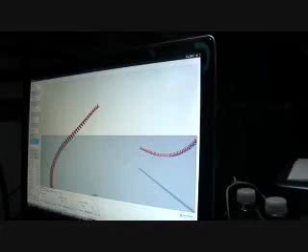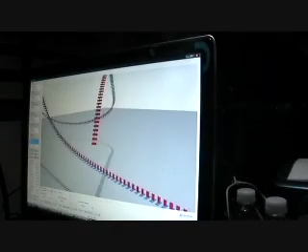And then we add another section, and we've sort of got a little ejector hill here. This is a trick that I do with this. Now I can change the length of that ejector hill, but what I want to do is make sure that the segment right after it will be able to clear in a good way.

So we'll bring that up to about 2.5, and then we'll add a roll, a positive, let's go 40 degree roll.

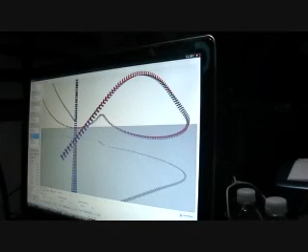And then we can add a little bit of time to that, so I put it up to 1.2. Now the ejector hill that I had before will increase that time zone, and that's making it cut a little bit too close, so we may actually have to make it less than 1 second. So there we go. Now it's a 0.8 second ejector hill.

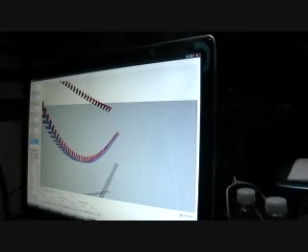And this is what I've always found to be the trickiest part of making Newton coasters, is it's hard to get them to a good stopping point.

And so we'll add a new segment, and then we'll set the roll to 0, which means subtract 40. And then we'll take the G's, the vertical, and we'll put it down to, let's go 0. So we subtract 2.5.

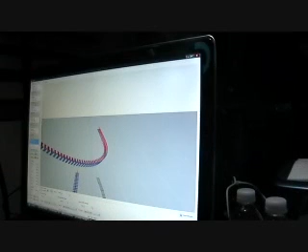And then let's make the time zone down to 0.8. And this could cause high G's, but we're just going to have to risk that this time. And right now you can see we're sort of going to be pointing back onto the track right now.

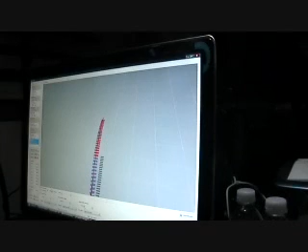So we're going to do a little bit of a weird move, and we're going to take the lateral settings and add negative 0.2, and with that we can see it's going to start diverting it away from the roll, and I'm seeing already that it won't quite be enough. So we're going to move back to this segment right here.

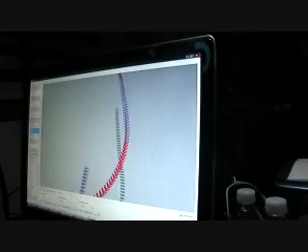This is the one that has no changes, and we're going to bring the time of that one down to 0.8. In fact, that's looking so good already that we might just take off.

This is another trick, of course. You can adjust certain time zones, especially ones that don't have any changes, and as you can see, by changing the time, it changes which way they turn.

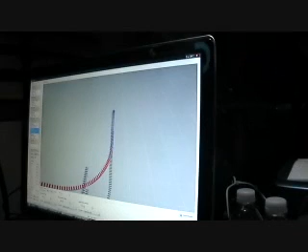Now we're sort of, 9 is too much, 8 is too little, so we can go in here and edit and tack a 5 on, and wow, that actually looks quite good.

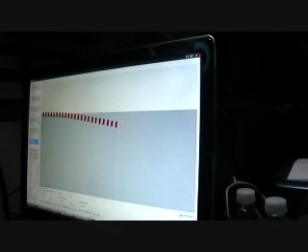Then at the last second, then we'll bring the vertical G's up to 1, and we'll shorten the time segment to 0.7. And then we will save our element.

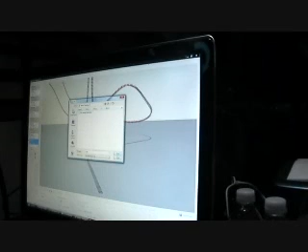So we click over Save Element, then we got to get a path. So we will navigate to our element folder for the Newton tutorial, and then we'll save this as part 1. And we save there, and then click Save Element.

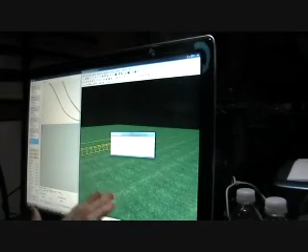And voila, now we go into our No Limits track, and let's see how well it fits. Control E, part 1, open, and you do not want to touch the percentage for this. It needs to be exactly 100. And click OK, and wow, we've got our coaster.

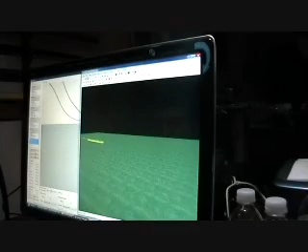And it looks a little bit scrunched up against the wall, which could be bad. So we'll Control Z that out, and we'll go to top view, and just drag a box around everything, and just hold down on the down arrow for a little bit. Or we can drag it, and we'll put the vertex of the end segment on the launch, and we'll try and get it right about on the origin.

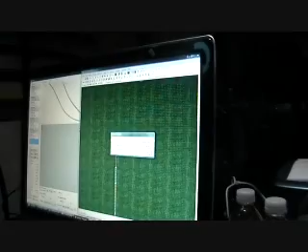And now, when we add on part 1, there should be plenty of room. And look at this. The segment actually ends almost exactly where the station is. That'll be pretty nice for us.

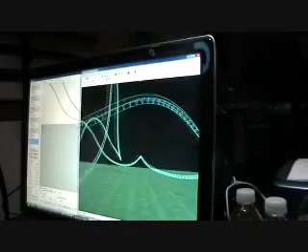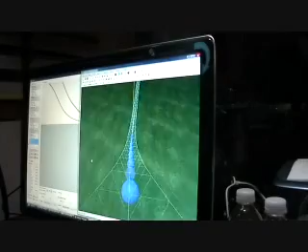It'll make getting back to the station a bit easier. So now we've got our Newton coaster. It's a good thing to ride this in the simulator and just move through it to see if there's any really rough spots. So we've got that part that's smooth, and there's the airtime curve, and here's the overbank curve, and into our 0G roll, and into our corkscrew, and then up, last ejector hill, and curve, and brake run.

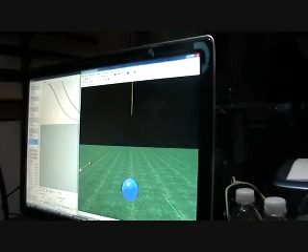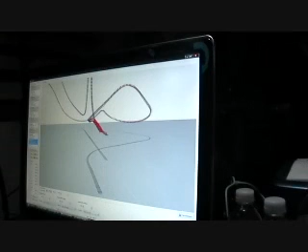And for the brake run, we got to go a little bit more advanced into elementary and Newton. So what we'll do is, when we go back into Newton, and then we click on the last segment, and then we look at the pitch, and we see in here that the ending pitch is -7.119.

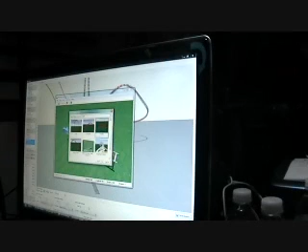So what we'll do is we'll open up elementary and Control New, or Control N for new, and we'll do straight, and we can just go with 10 meters again, but for the slope, now we input -7.119, and this will be our brake run.

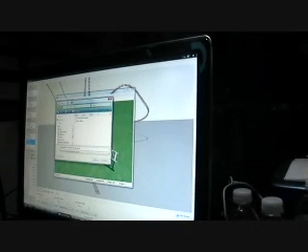So when we save this one, we'll go 10 meter straight at 7.119 degrees down. And then we save that. And then we go back into NoLimits, and we select our sloped run, and we just hit OK.

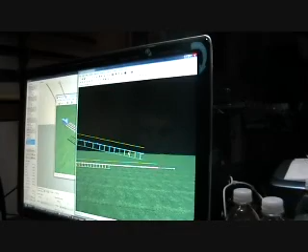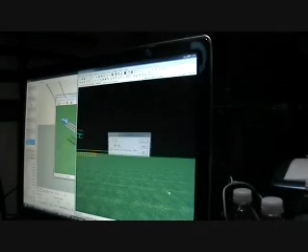And that's not quite as long of a brake run as we want, so let's tack on a little bit more. We'll move it up to 150. And that brings us a pretty good way down, but we need a little more still, so guess and test. 175 should do it. There.

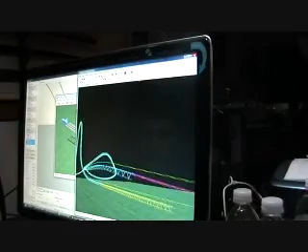That's pretty good, and then we can put in a slope that we can use to reconnect. And we'll set this to brake run. So, let us go into the simulator and test. Save it as Newton Tutorial Part 2.